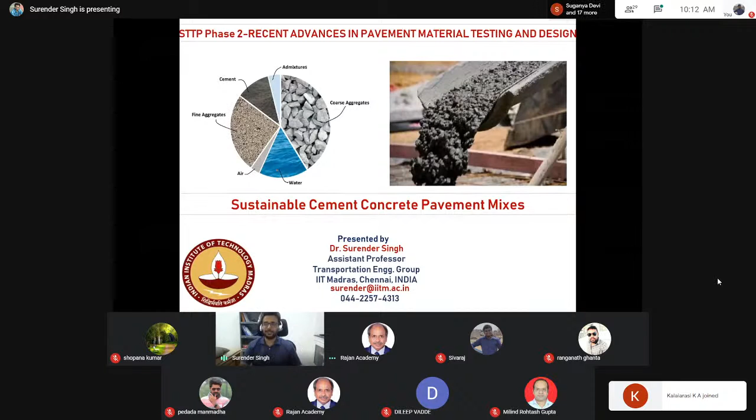Also, we are designing based upon flexural strength, not compressive strength, which is the usual case for buildings. So today we'll start with the introduction, then go through some fundamentals, and then see how to design pavement quality concrete, how to design dry lean concrete, how to design roller compacted concrete, and how to design interlocking tile blocks.

In India we can see everywhere we have pavement quality concrete and dry lean concrete as a base course, and then we have roller compacted concrete. Nowadays it's a recent development and you can see interlocking tile blocks everywhere. So if you are a transportation engineer, you should know how to design these mixes. It's not a difficult job, it's very simple. Today we'll be learning how to design these things and how to induce sustainability with the help of various materials.

If I talk about the pavement section, the cross section of a typical pavement will have the embankment, the subgrade, and two layers of the GSB. Remember, two layers of GSB: one as a separation layer and the other as a drainage layer. The separation layer separates the upper layers from the subgrade, that's why it's a little bit denser. And for providing drainage, we provide again one gap graded GSB layer.

Then we provide a base course, or we can call it an upper sub-base course, named dry lean concrete, which we discussed yesterday. And then we have the pavement quality concrete slab, and in between, to provide debonding, we'll be having a plastic sheet overhead. Now the question is how to design the different layers of a pavement.

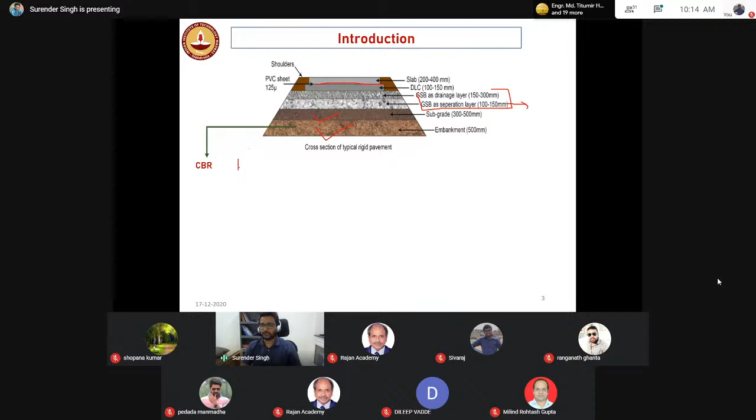For the subgrade and embankment, both we design based upon the CBR value normally. That's the mixture design, not the pavement design. In case of pavement design, we design based upon the modulus of subgrade reaction value, that is the K value.

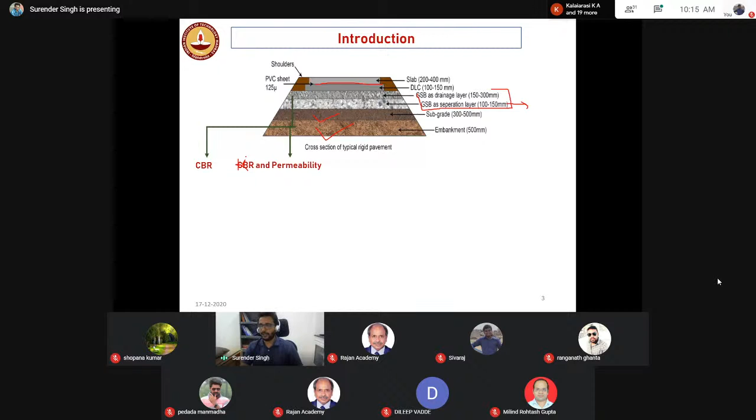For GSB, we design the mixture based upon the CBR value and the permeability. And as far as dry lean concrete, we design the mixture keeping in mind that it should achieve some compressive strength at 7 days of curing.

For the top slab, that is the pavement quality concrete slab, we design based upon the flexure strength. Earlier we were designing based upon the compressive strength, but remember, if you are a transportation engineer, you should design based upon flexure strength. There are other criteria also like abrasion resistance and durability, but we hope that if we are getting the adequate flexure strength, since strength is directly proportional to abrasion resistance and durability, we'll be achieving it.

But if it is a special case, like Tamil Nadu or coastal areas, then we need to design keeping some of the durability parameters in mind. But all over India, in a nutshell, we should design based upon the flexure strength until and unless it has been specified in the tender.

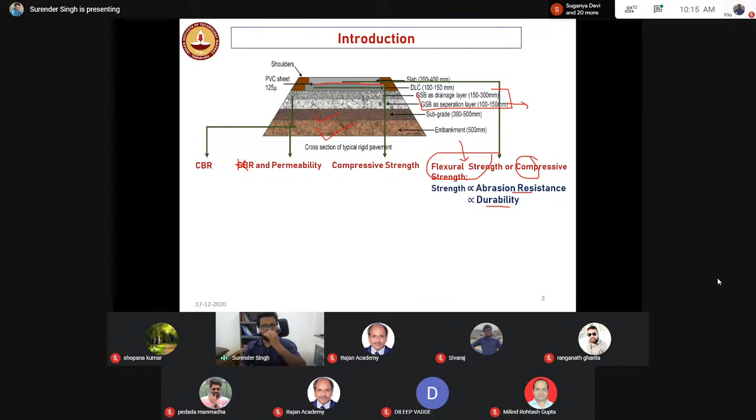So what are the various codes? There are various codes. If you want to design the subgrade or the GSB, you can refer IS 2720. If you want to know the permeability for drainage, you can refer IS 2720 Part 36. If you want to design DLC, you have to refer IRC SP 49, that is Indian Road Congress Special Publication 49. If you want to design the pavement quality concrete, you have to consider IRC 44.

And for roller compacted concrete, we have recently updated this code, and it will be coming in a few months. That is IRC SP 68, second revision. It will be coming soon.

Now coming to the fundamentals, we'll first discuss pavement quality concrete. Let's say I'm sitting in my IIT laboratory, and a contractor comes to me asking to design a pavement for an expressway. We know expressway is very important, so what I'll be doing is asking them for the materials and then doing the mix design.

Let's say the contract requirement for the expressway is that it should achieve 4.5 MPa flexure strength at 28 days curing at field conditions. But remember, I'm sitting in my laboratory, I have my AC, the temperature is 27 degrees Celsius, and I'll be working with a small amount of mixture.

I'll be measuring the water in a pipette, a capillary tube. But what is happening at the field? The scenario is completely different. There will be hotness, there will be wind, they will be measuring the water in buckets and throwing it into the mixture. So you cannot compare laboratory conditions with field conditions.

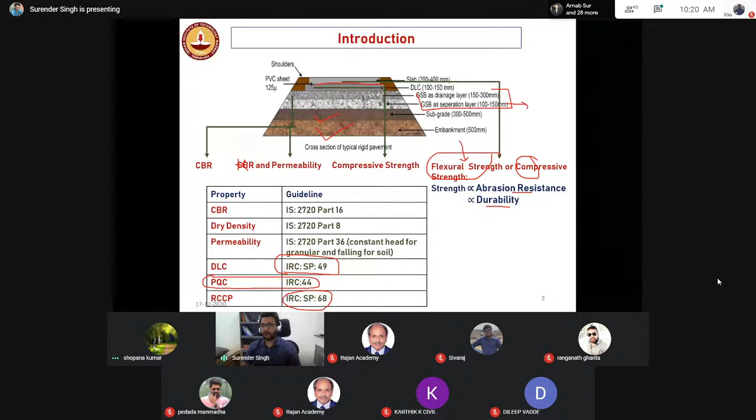Hello? Sir, just a minute sir. Sorry for the disturbance. Can you just show the previous sketch for 2 minutes, sir? Just 2 minutes, 1 minute sir. What happened? I'll be sharing my presentation slides, right? Just this one, sir, other things I have. I didn't get it. Thank you, sir. Thank you, sir, I can proceed. Yeah, I'll be sharing my presentation with all of you, so whenever you want to write something, you can write it down.

So what is happening is that we have two models. When you're designing, you have to decide the target mean strength. So what should be the target mean strength? It's not like you have to achieve 4.5 MPa so you just take 5 and design for 5 MPa. It should not be like that. We don't know at the field what could be the condition, so we'll be taking a higher factor of safety.

So we have two models. Whichever model is giving you more strength, you have to design for that strength, and then you'll be assured that at the field, because of the ambient condition, you can achieve the minimum strength, recommended strength, that is 4.5 MPa for expressways. Why am I teaching this thing? Because it is one of the most important things. Engineers don't know about the design, they think that the design is very, very typical. Definitely the design is a little bit difficult, but today we'll learn how to design in a good, simpler manner.

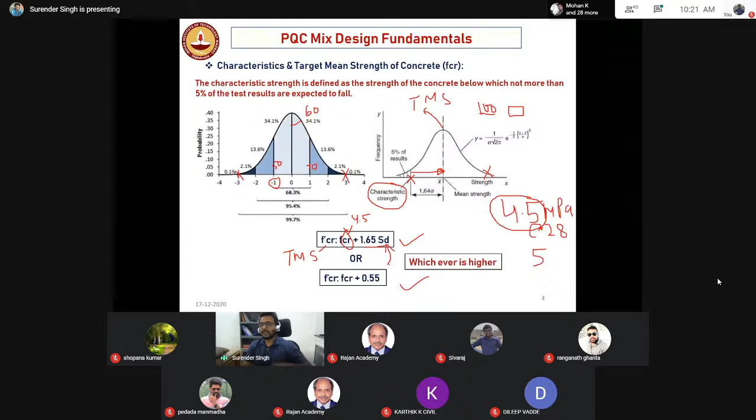So now how to calculate the standard deviation? This question is how to calculate this standard deviation. Nowadays different mixtures are coming, so let's say it's a big project, a big expressway. You have to decide the standard deviation for each mix. So how to do it? You ask the mixture agency. When the mixture RMC will be coming, you make 30 specimens, and then you use this model in order to calculate the standard deviation.

If there are two RMCs coming having different mixtures but the strength is the same - different mixture means, let's say in one of the columns, or in DLC you are using fly ash, in PQC you are not using it, something like that - then you can use this formula. These formulas are simple. N is equal to how many number of specimens you are considering, let's say 30. Xi is your observed flexure strength, and X bar is your average flexure strength, that is average of 30 specimens. And you keep on doing it, you will be getting the standard deviation value.

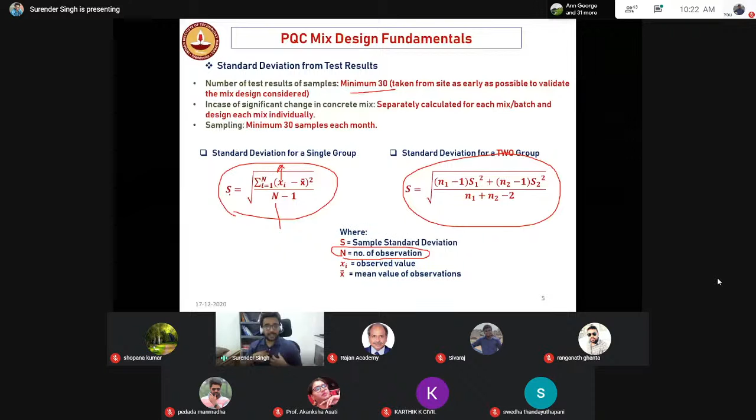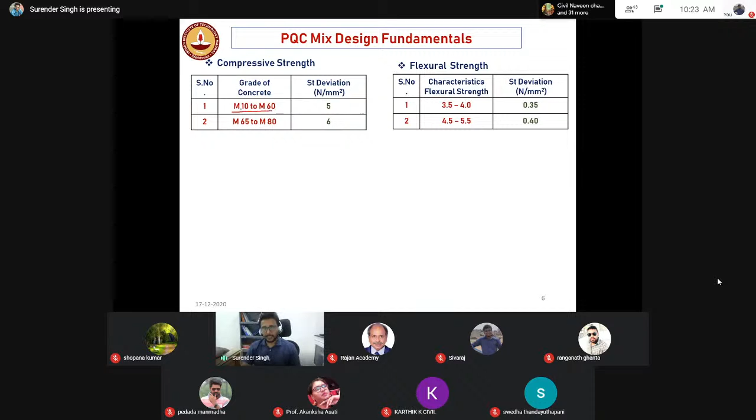If you are not able to remember this formula, or let's say your site is very small, or you don't know how to design the mixture, what you can do is IRC 44 provides you with the liberty to directly take the values from the table. The tables are given in IRC 44. So if you are designing the pavement based upon the compressive strength, when your strength is between M10 to M60 - M10 here means 10 MPa strength at 28 days, M60 means 60 MPa strength at 28 days.

That's why we are writing M60 or M10. Okay, but I suggest you don't go with the compressive strength because it's a pavement. For pavement we need to go with the flexure strength.

If the flexure strength requirement for expressway is around 4.5 MPa to 5.5 MPa, then you can directly take the standard deviation value as 0.4. For national highways and expressways, the strength should always be between 4.5 to 5.5, so you can directly remember the standard deviation value should be 0.40.

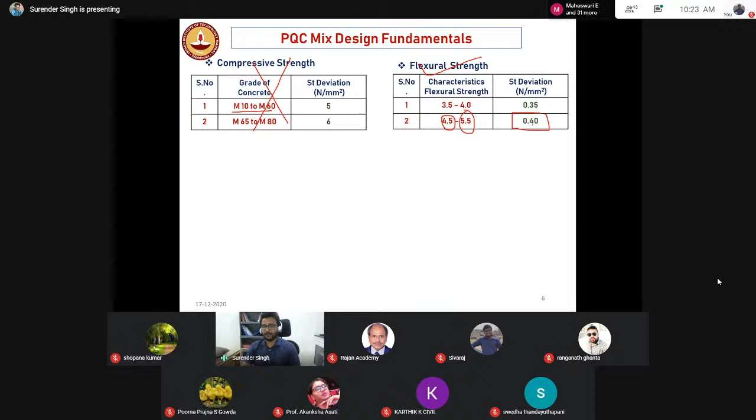So now what was the formula? Target mean strength is equal to the strength you have to achieve, 4.5 MPa plus 1.65 into standard deviation. What is standard deviation? 0.40. Then you will see the value is around 5.16. That means at this laboratory, when you are designing, you have to design for 5.16, and in the field, the minimum strength that should be achieved is 4.5. That means you are taking the factor of safety.

Now the other thing is I have seen many researchers, many faculties in different colleges, what they are doing - they are always casting 100 by 100 cubical specimens to get the strength value, or they are going with 150 mm. But they don't know the fundamentals.

Why are we going with it? It depends upon the size of the aggregate, not the maximum size - yesterday we discussed, right? It should be nominal maximum size, that is the largest sieve over which some of the aggregates will be retained, but not more than 10%. But why is it happening? Because of the wall effect.

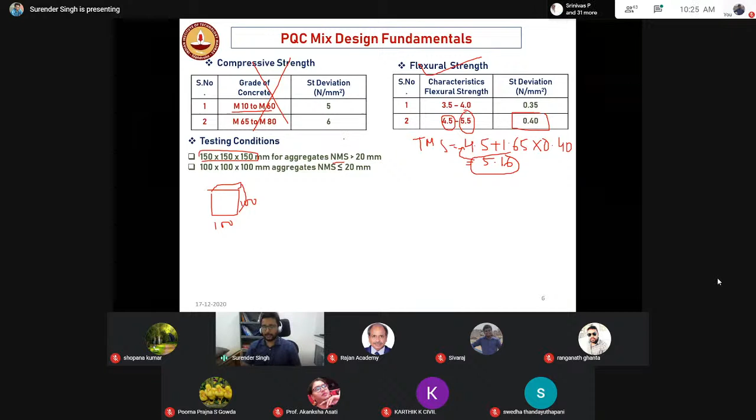Wall effect means, let's say we did one test here. You are making one cube, let's say of 100 mm, and you are taking the aggregate nominal size of 20 mm. So what will happen when you compact this specimen? The aggregates will be compacted easily in the interior, but because there is a steel wall or iron wall - the walls of the mold - the aggregates could not be compacted at the walls, and this is known as the wall effect. When the aggregates are not able to be compacted, the voids will be higher, and if the voids are higher, it will require more cement paste.

So what is happening? We know cement is the most costly component, right? And you are sitting in the lab because you are not having a 150 mm specimen mold, you are taking a 100 mm specimen mold and compacting it - 10% extra cement paste is required, and then you will be getting the strength. But at the field, that 10% extra cement means your economy of the project will be significantly lower. Your cost will be significantly rising.

So that's why if your nominal maximum size is less than 20, then only you can go with 100 into 100 into 100 mm cubical specimen. If your nominal maximum size is more than 20 mm, to avoid the wall effect, we have to cast cubical specimens of 150 into 150 into 150 mm.

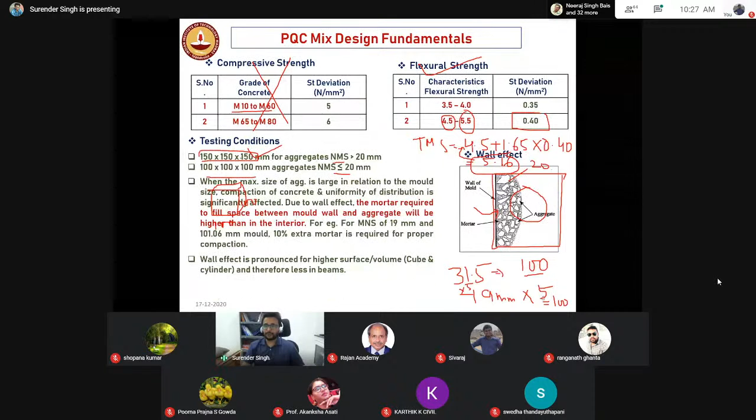But sometimes you will be going with cylindrical specimens. Now the cylindrical specimens can be of two sizes, 100 into 200, or you can have 150 into 300. Which one to select? It depends upon the nominal maximum size. So what you do, you keep the diameter like 150 mm, divide by the nominal size, 31.5 - it should be more than 3. If it is more than 3, then only you can select this diameter.

When you go to the site where the pavement has already been constructed and you are cutting the core, most of the time we are not able to cut the core properly, especially from the dry lean concrete, which is the base course. So how do you cut a core? If your pavement thickness is more, you have to ensure that the height of the specimen divided by the diameter of the specimen should be minimum equal to 1. If it is not, then you cannot test that specimen.

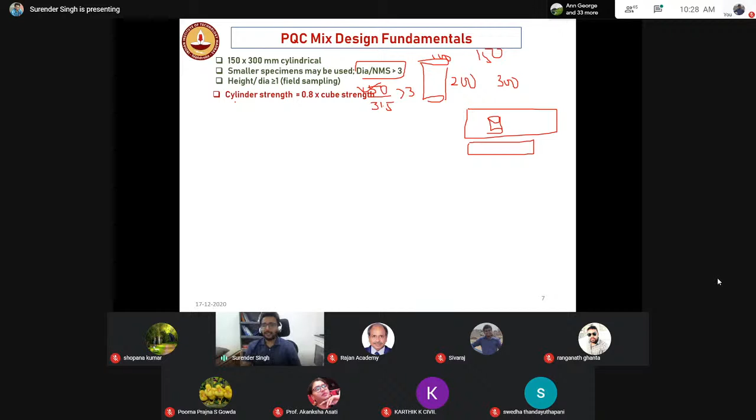These are some fundamentals which will be required when you are in the field. When you are testing your cylinders and somebody is testing cubes, the students working with the cubes will be happy, saying we are getting good strength. But the students working with the cylindrical specimen will not be happy, because obviously the cylindrical strength will be 80% of the cubical strength.

So at the site, when you take out the cylindrical specimens, and what you did during construction was fabricate your cubical specimen, there will be a deviation because of the shape effect.

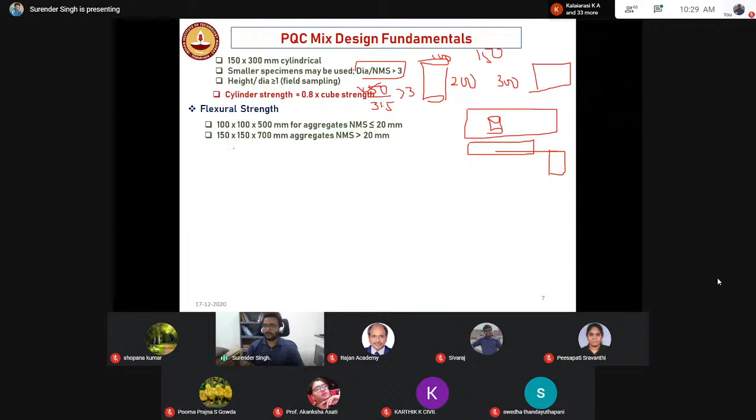If I talk about the flexure strength, normally for PQC, that is pavement quality concrete, we design for flexure strength. Remember, for the field, for the pavement, we always have to decide based upon the flexure strength. So the flexure specimen, we call it the prism specimen.

Similarly to the cubical specimen, when your nominal maximum size is more than 20 for PQC, you have to always go with 150 into 150 into 700 mm. I've seen many research papers where they go with 100 into 100 into 500 mm, despite their nominal maximum size being 31.5, which is wrong.

The other thing I discussed yesterday also: in the structural laboratory you will have a 3-point bending apparatus, and in the transportation laboratory we have the 4-point bending apparatus. So when you are designing your structures, it is 3-point bending. When you are designing your pavement, it should always be a 4-point bending test.

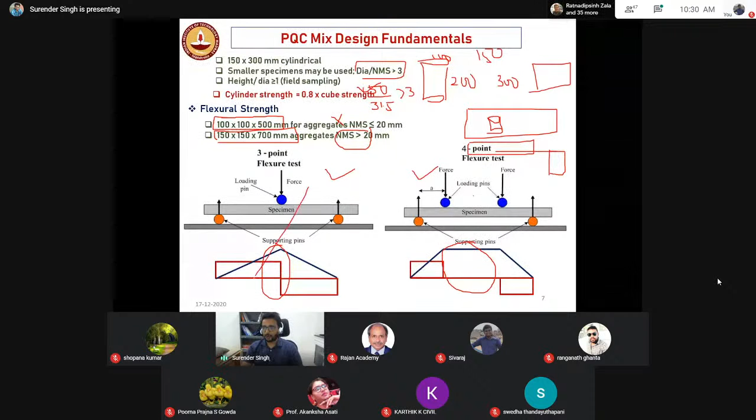Why? Because our pavements always fail in pure bending, where there is no shear force. But if you evaluate the strength by virtue of the 3-point bending, you can see there is some shear force also present at the mid level. That means it is not okay to use 3-point bending when dealing with pavements.

Now, some fundamentals you should always be aware of, like the various factors involved. Let's say a contractor comes to me and asks, sir, I need 4.5 MPa strength but I am not able to achieve it. What should I do? The first question I'll ask is, why don't you increase the cement content, or why don't you decrease the water content? So that means the most dominating factor is the water by binder ratio.

Remember, I'm not using water by cement ratio. Earlier we were using water by cement ratio. Now we use water by binder ratio, because nowadays we are using fly ash, PPC, and slag cement. That's why we say water by binder ratio.

So as the water by binder ratio increases - let's say I'm writing cement for simplicity - when the water by cement ratio is increasing, what will happen? How will it be increasing? Either the water is increasing or the cement is decreasing. When the cement is decreasing, that means obviously your strength will be decreasing. This law is known as Abrams' law: if you want to increase the strength of your concrete, you decrease the water by cement ratio.

The second most important thing is the degree of compaction. Why is degree of compaction one of the important parameters? Because let's say a field engineer used 300 kg of cement, next time he used 400 kg, next time 500 kg, and still he is not able to get the required strength. Why?

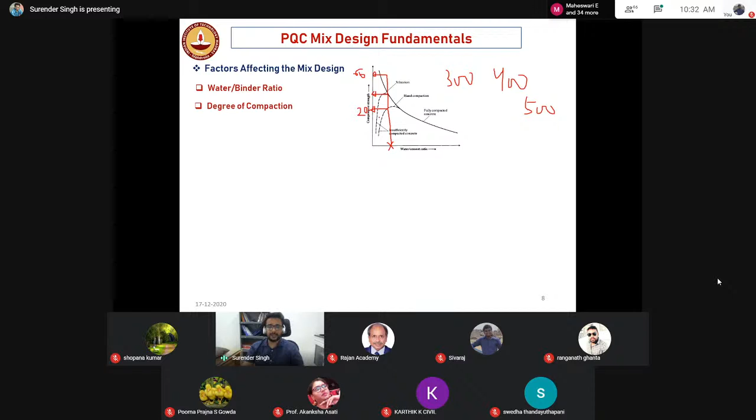At a constant water by cement ratio, if you are not able to compact your pavement fully, you can get three different strengths. The strength can vary from 60 MPa to 20 MPa, because of poor compaction. That's why compaction is very much required - you have to do proper compaction.

The third thing is shape of the aggregate. If you are having angular aggregates, aggregate to aggregate interlocking will be there. The voids will be lesser, so the cement paste requirement will be lesser, and the strength of the concrete will be more, because strength of the aggregate is more. Similarly, if you are using well-graded aggregates, the porosity will be lesser, strength will be higher.

And the size - yesterday we also discussed that the nominal maximum size of your aggregate should always be the thickness of your pavement slab divided by 3 to 5. We need good aggregate interlocking, so the nominal maximum size should always be lesser than the thickness of your pavement slab divided by 3 to 5.

Why? Because if you increase the size, the cement paste requirement will be lesser, but the bonding between the cement paste and your aggregate will be very poor. Bleeding water will be there, and if the bleeding water is coming, the water by cement ratio will be increasing, and you will be getting lower strength.

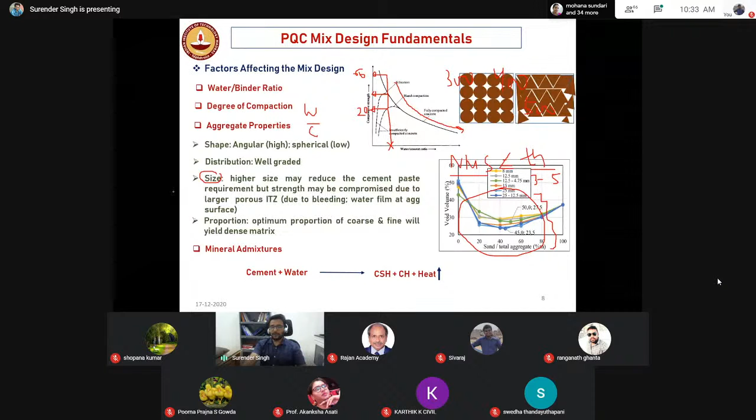Similarly, the ratio of coarse aggregate to fine aggregate is an important parameter. Nowadays you will have this question - why are we using fly ash? Sometimes I'm afraid if I use fly ash it's not giving these properties, or it's a waste material, why use it? So the fundamental is that when you add cement with water, you get two hydrated products named calcium silicate hydrate and calcium hydroxide.

This calcium silicate hydrate (CSH) gives you strength, and this calcium hydroxide (CH) doesn't give you anything - it's also a durability concern. So for strength I need CSH, and this CH is a byproduct. Can't I convert it into CSH? Yes, obviously you can convert it - you have to add silica externally from outside.

So whatever waste materials you want to use for replacement of cement, you can use it, but it should have silica in it. Fly ash has around 70% silica, silica fume has around 90% silica. That's why when they are used, they increase the strength as well as reduce the durability risk.

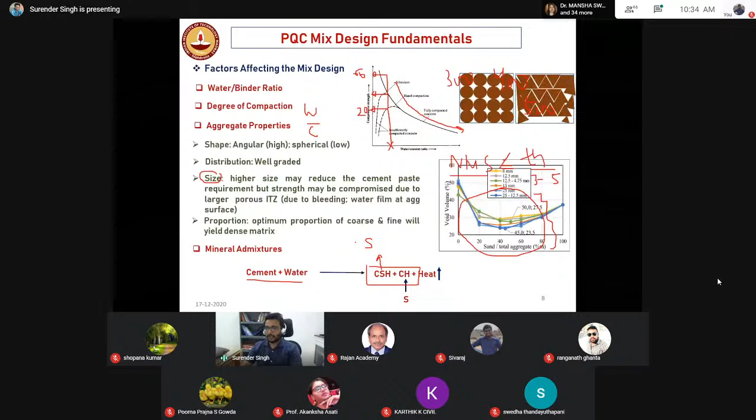Now the other question is that we have two approaches: weighing approach and volume approach. You have seen at the site what is happening - for normal house construction, they will be using some pans, in Hindi we call it a tasla.

So they will be filling it and then dropping it in the mixture. But you have seen that when they are taking the aggregate, they'll fill the pan fully, but when they are taking the cement, they'll keep it lesser. That means volume batching is not good at field conditions.

But when you are a researcher or designer, the weight method is not good. So which method is good? At the field, volume batching is not good because they use the same bucket for cement and aggregates, filling cement lesser and aggregate more. So the mix design will be changing.

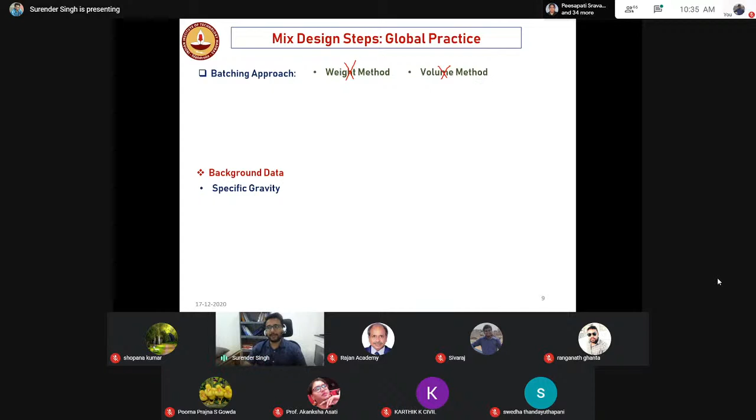But for the designer, the weighing method is not good because let's say we have two aggregates of the same size, but one aggregate has porosity - say some recycled aggregate. Yesterday we discussed that recycled aggregate has lesser specific gravity. If you follow the weighing approach, what happens? Let's say, hypothetically, one heavy aggregate equals two porous aggregates by weight.

And when you are keeping it in the concrete formwork, it will occupy the same space because the shape and volume are the same. The shape of the aggregate is same, the size of the aggregate is same, so it will occupy the same volume and the concrete will be poor.

So that's why we say that the weighing approach is not good. We have to consider the specific gravity of the aggregates. If you are considering the specific gravity, then we can design a very good mix. But for that, when you are designing, you have to consider the volume approach. But when you are recommending your mix design to the field engineer, then you have to recommend it in terms of weighing approach, because at the site complications can be heavy.

I have a few pictures also that I'll be sharing at the end of the presentation. So what are the data that will be required?

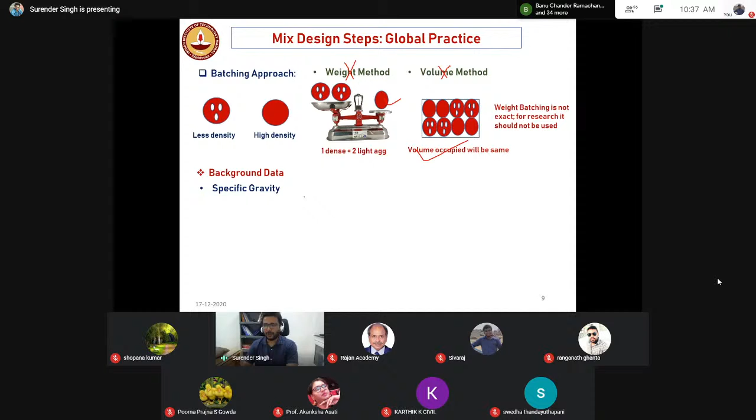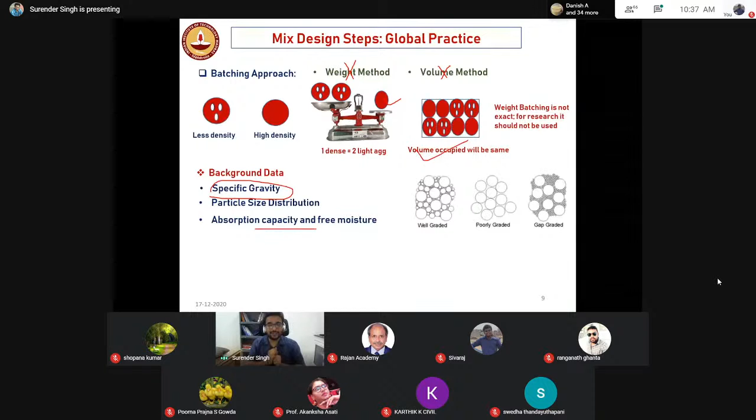Definitely, I need the specific gravity values. I'll be needing the particle size distribution. I'll be needing the water absorption capacity of the aggregates. Why? Let's say yesterday night in Chennai it was rainfall, and you thought you will be making your pavement, but because of the rainfall, the aggregate has absorbed some water, so it will be changing your water by cement ratio. So you should know about this, how much water absorption can be there, and there are many more things.

So at world level, what is happening? Everywhere the design of the pavement is almost the same. So if you get to know this step, then definitely you can design the pavement everywhere across the globe. So these are the steps. We'll not go into the detailed steps.

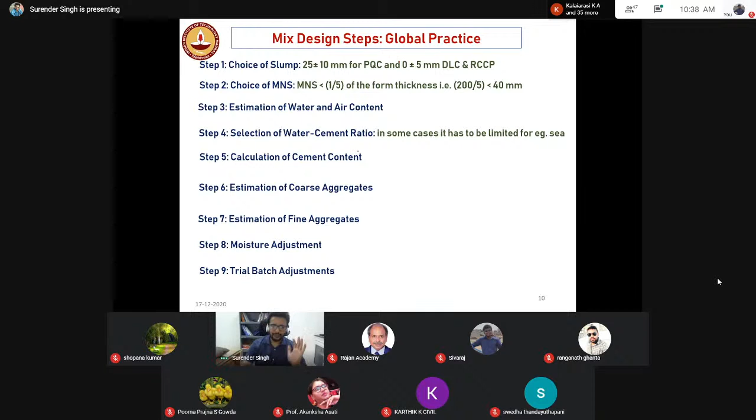We'll be seeing a simple procedure. So what we need for our concrete - we are mixing coarse aggregate, we are mixing fine aggregate, we are mixing cement, we are mixing water, and nowadays we are mixing fly ash also. And when you are compacting it, there will be some voids, that is air voids. So as a designer, you have to design this thing, based upon the volume, and then you are recommending to the field engineer in terms of the weight - what should be the weight of water, fly ash, fine aggregate, and coarse aggregate. If you are using some recycled aggregate, you can add that also here.

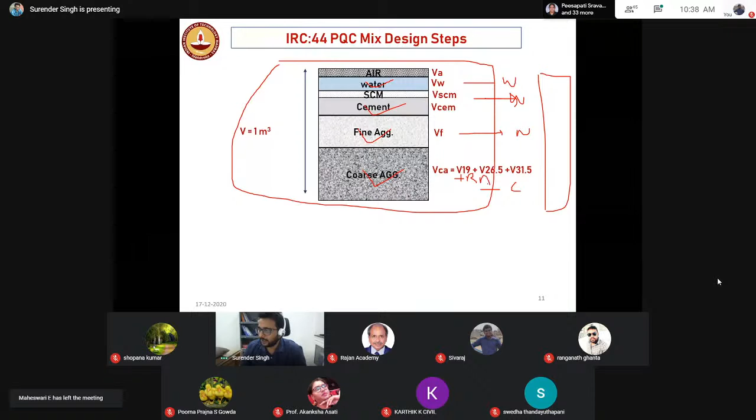So how to design it? Remember two things here: you have to design based upon the volume, and then you have to convert the volume into weight. Why weight? Because at the site, volume batching is not considered to be good. So how to convert volume into weight?

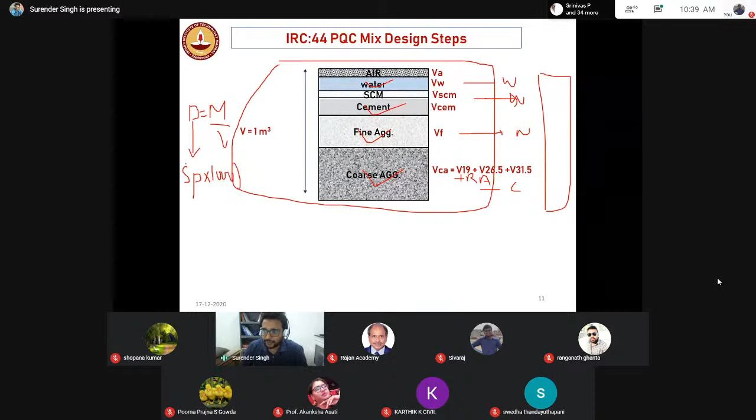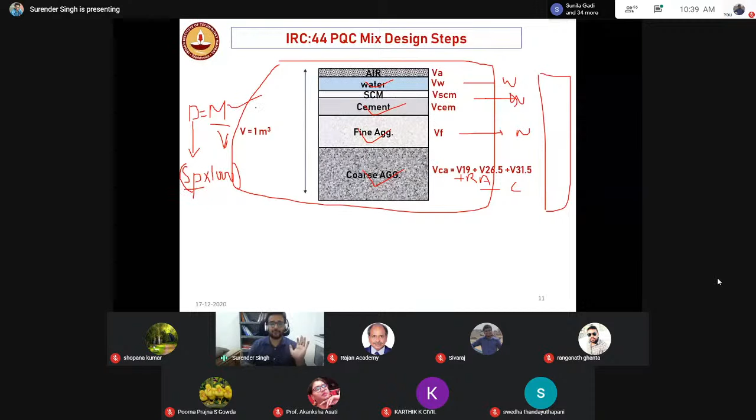You know the formula - density is equal to mass upon volume, right? And what is density? Density is nothing but specific gravity into 1000, because we are measuring with respect to specific gravity of water. So if I know the volume, and if I know the specific gravity of coarse aggregate, fine aggregate, cement, then I can get the mass. This is the simplest formula that you have to remember, and you can design your pavement.

So we discussed this. So what is the step? First of all, remember this picture or the schematic. We have to decide the volume of air, volume of water, volume of fly ash, volume of cement, volume of fine aggregate, volume of coarse aggregate. We have to design, and then with the help of density equals mass upon volume, we have to convert it into weight. So in a nutshell, we have to recommend in terms of the mass of coarse aggregate, fine aggregate, cement, or whatever other material we are using. So how to do it?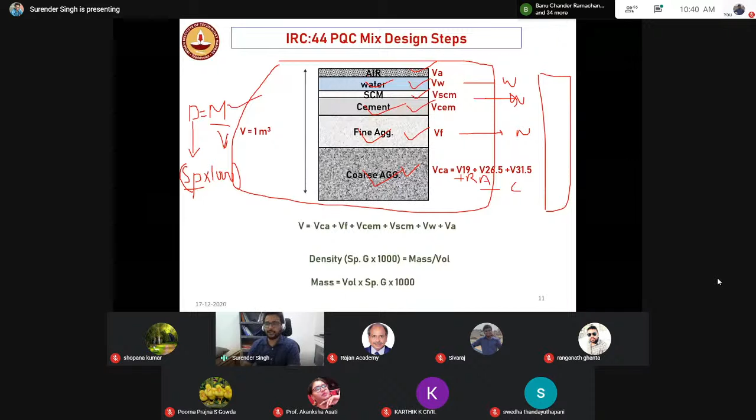One by one we'll be finding it out. First thing is air - how is the air coming? When you are compacting your aggregates, when you are compacting your mixture, there will be some voids. So how to decide? You don't have to decide - there is a table given in IRC 44 specifications. Based upon your nominal maximum size, you can directly read the air void. And remember, for PQC, the nominal maximum size is 31.5, so you can directly remember this value 0.8. It's very simple, right? What is the next step?

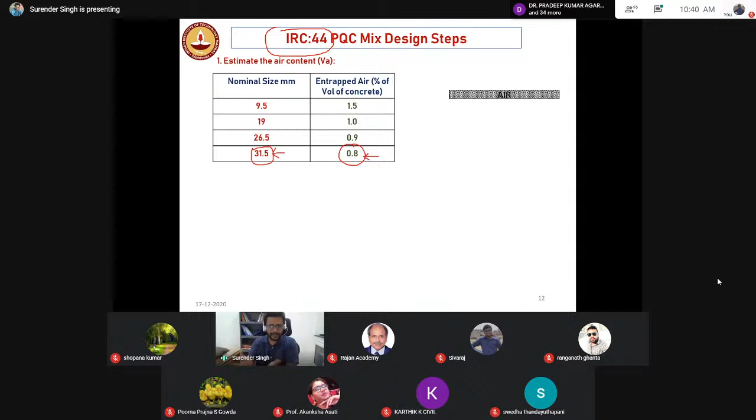You have to calculate the water, you have to calculate the fly ash, you have to calculate the cement. So how? Let's say we know the water by cement ratio, that is the important parameter we discussed in the factors affecting.

It is a more dominating parameter, right? So there is a table given in IRC 44, and we know for my expressway - this time we are designing the expressway, right? Let's say the strength requirement is 5 MPa.

And you are using cement OPC 43 grade. So from the table you can get the value of 0.34. This should be the minimum water by cement ratio that you have to use. So you got the minimum water by cement ratio that you have to consider is 0.34.

So now if I can able to get either water or cement, because I have already the water by cement ratio, then I can decide the cement also, right? So the first thing is water. How to decide the water? Again there will be a table, because the IRC 44 is providing you everything. You just need to know the fundamentals and the design procedure.

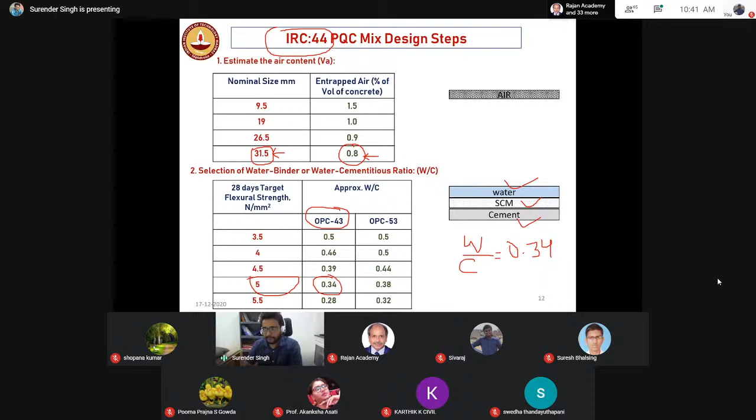We know water is being affected by many things that we have discussed. Like if you are increasing the cement content, what will happen? You will be needing more water. If you are increasing the size of the aggregate, you will be needing lesser water because of the lesser surface area. If you are using round aggregates, because they are having lesser surface area, they will be requiring lesser water. If you are using super plasticizer, you will be requiring lesser water. So there are many factors on which the amount of water will be affecting.

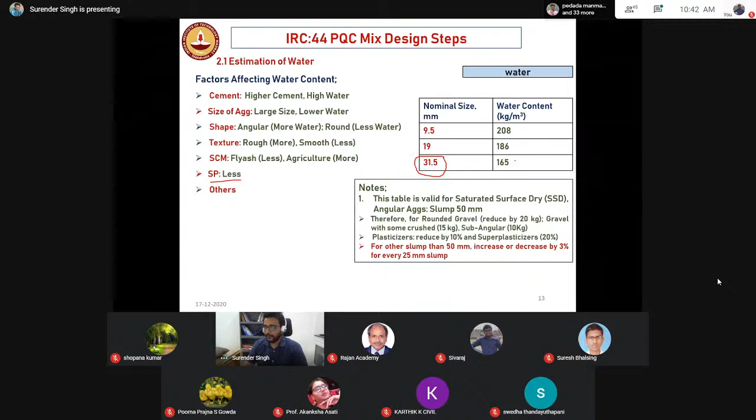So these are the fundamentals. If you want to learn, you can learn, or else there is a table given in IRC 44 which says that if you are designing your PQC mixture whose nominal maximum size is 31.5, you can directly get the water from the table, which is 165. But remember one thing, this table is valid for a slump value of 50 mm, and for PQC our slump value requirement is 25 mm.

So obviously if this water is corresponding to 50 mm slump, if you want to reduce this slump, what do we have to do? We have to reduce the water, right? So how much water do we have to reduce? We have to reduce it by 3%. Our water by cement ratio was 0.34, our water was 165, but we have to reduce it by 3%. So what should be the water? 0.97 multiplied, you will be getting the water around 158 kg.

Now if I get the water, I keep the water here, I bring this one here, I can get the cement value. And then you have to check that the minimum cement value should be 360 kg and the maximum cement value should be 450.

Now this is a twist here. As a student, as a field engineer, I think that if I keep on increasing the cement content, my strength will be increasing. But IRC is asking you, no, you cannot increase the cement content beyond a particular limit. What is the reason? I'll not be telling you the answer - maybe some of you know the answer or you can guess it. See, in my class you can guess anything. Until and unless you are not guessing it, that means you are afraid, or you don't know, or you are not getting what I'm teaching here.

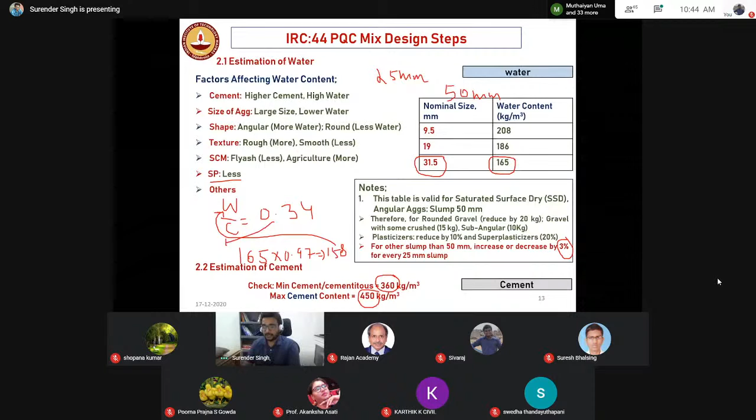Now the next thing is that this is the sustainability aspect. Nowadays we are using fly ash. The ministry says that you can use fly ash up to 30%. Let's say you are using 20%, and your cement content came out to be 400 kg. The ministry says that you can replace cement by fly ash in a proportion of 20%. So what should be this fly ash content? Obviously you will be multiplying by 20, and you will say yes, we can use fly ash as 80 kg, and then 320 we can have as the cement content, right? This is the normal procedure.

What you are thinking is that the ministry is saying you can replace cement by 30%, or let's say 20% fly ash for this example. So what should be the fly ash? Okay, 400 kg is cement, they are saying 20%, so you multiply by 20, you get 80 kg. If you are using 80 kg of fly ash, then 400 minus 80 is 320 kg of cement you are using. But this is the wrong procedure.

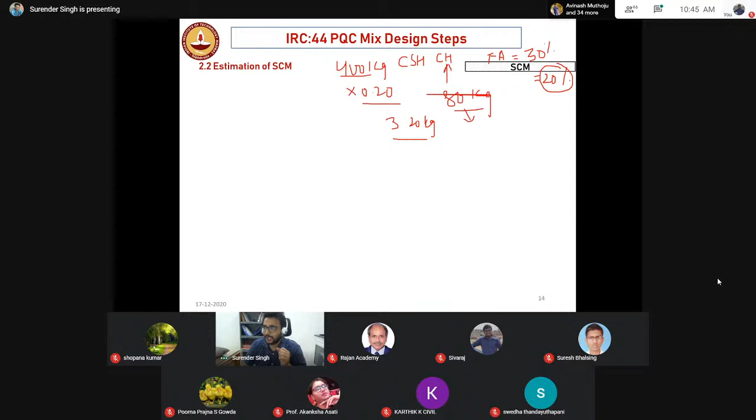Remember, this is a recent advancement of fly ash you should know. Remember we discussed that when you add water with cement, you get CH and you get CSH. So what you are doing is adding fly ash from outside, it will react with CH and convert into CSH. That means it's a cementitious material, right?

So every waste material will be having different cementitious content. So if we come to the laboratory, we have to think how much cementitious content it will be giving me if I'm using some supplementary cementitious mineral admixture, that is SCM. If you don't have any value, if you don't have the laboratory, simply you can increase the cementitious content by 10%. We'll take an example.

Let's say we have 400 kg that we were using. Now if I'm using fly ash, let's say 20%. So I can see, without any experimental data, I'm thinking that with the help of fly ash I can increase the cementitious content by 10%. So you have to multiply by 1.10. You'll be getting a value of around 440. So that means now the cementitious content has been increased.

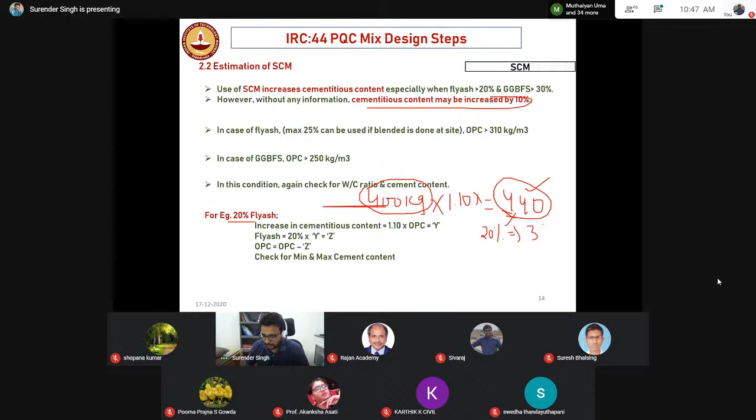Earlier, how much cement were you using? 400 kg. But because you are using 20% fly ash, your cementitious content will be increasing by 10%. Now your new cementitious content will be 440. Replace this 440 - 20% of this 440 should be your fly ash. How much is it? 0.80 into 440. It will be... no, 352 kg of your cement, and then 88 kg is your fly ash.

See the difference. Earlier, you were having fly ash as only 80, right? But cement was lesser. Now your cement is further more and the fly ash is increased. That means this is the method. I can repeat again if you want. Simplest thing is you have to come to the laboratory and see how much cementitious content can be increased. If you don't have any information, simply increase by 10%, and then you replace that cementitious content with 20% fly ash, and the rest will be cement, OPC.

So now we got the values of air, fly ash, water, and cement. Now what things are left? It's coarse aggregate and fine aggregate. Here there is a trick - we will be calculating the volume of coarse aggregate with respect to fine aggregate.

There is a table given in IRC 44. You don't have to be confused. What is the nominal maximum size? 31.5, right? What is the zone of the fine aggregate? We discussed yesterday that there are 4 zones - zone 1, 2, 3, and 4. Nowadays we are having only 3 zones - zone 1, zone 2, zone 3. We have abolished zone 4. So your fine aggregate is zone 2, your aggregate size is 31.5.

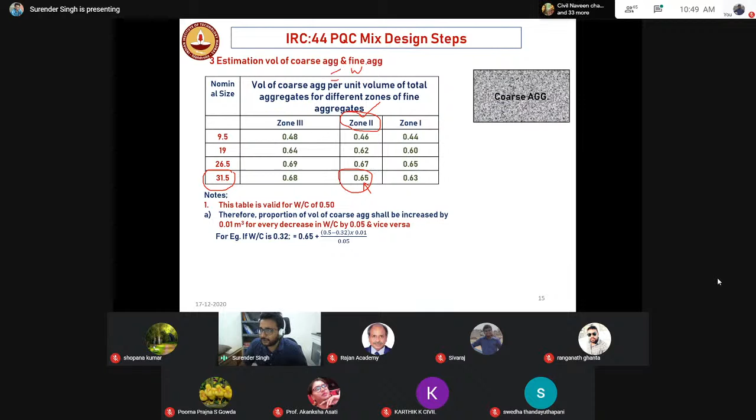Then you have to simply take the value from here. That means this shows that the ratio between coarse aggregate to fine aggregate is 65-35. Simply, it's a simple thing, you don't have to worry about anything. But remember again, this table is valid for a water by cement ratio of 0.5. And in our example, what was our water by cement ratio? It was 0.34. So that means you have to increase it.

In order to get more strength, you have to increase this ratio of coarse aggregate to fine aggregate. How to increase? It's given here. They are saying that if you are reducing your water by cement ratio by 0.05, you have to increase this content by 0.01 meter cube. In our case, what is the value? 0.34. So by how much are we reducing our water by cement ratio? By 0.16. So in that case, how much do we have to increase this? It is 0.01 divided by, this will be coming here, 0.05 into 0.5 minus 0.34. By this much we have to increase our content.

So now you got the value. One second, don't get confused. You simply have to read the value from the table, coarse aggregate to fine aggregate. Coarse aggregate 65%, what should be fine aggregate? 35%. Okay, that's it, now you got everything.

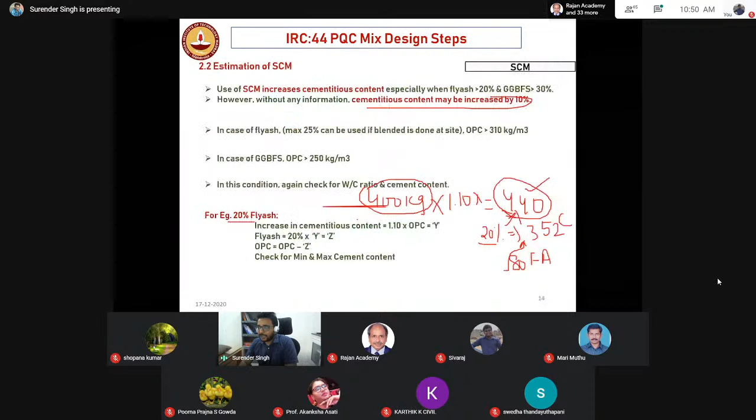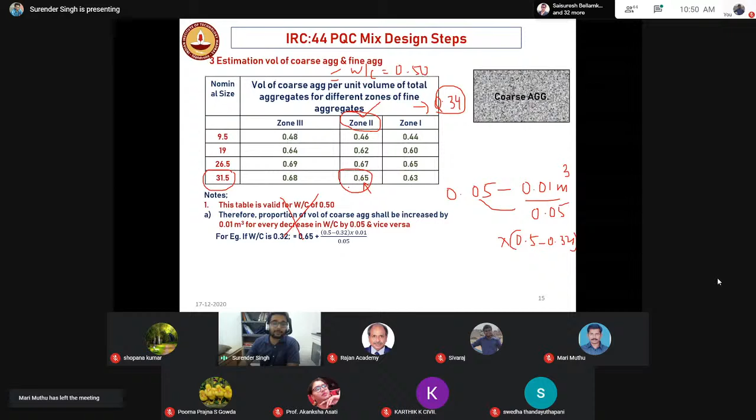But now, if you remember correctly, in the previous slides we were getting water in kg, cement in kg, and now you are getting your volume of coarse aggregate and fine aggregate in proportion, 65-35. You have to convert it. How to convert it? We have a simple formula that we have discussed.

What we have to do is decide this mixture. You have to give a mix design to the contractor in mass. Now you have to calculate the mass of fine aggregate and coarse aggregate, but we don't have it. What we have here is coarse aggregate 65%, fine aggregate 35%, right?

So what to do? Simply, I'll assume that the total volume is V, or 1 meter cube. I know the mass of water, I know the mass of fly ash, I know the mass of cement. Can I convert this into volume? Yes, obviously, we know density is equal to mass by volume.

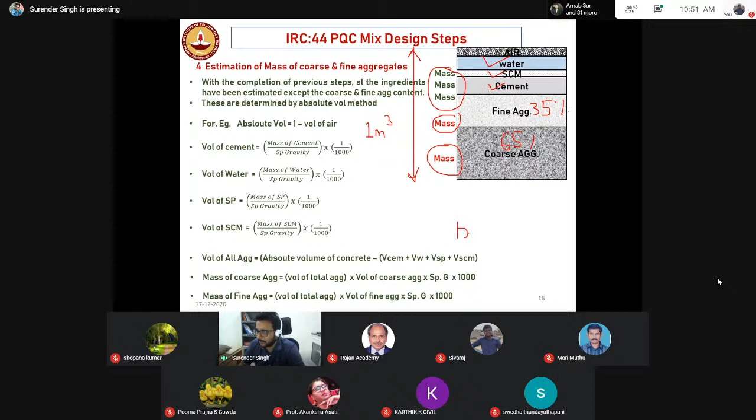I know the mass, I know the density. What do you mean by density? It is specific gravity into 1000, right? So how to convert the mass of water into volume? What is the specific gravity of water? It is 1. 1 into 1000, and then volume is equal to mass by density.

Then how to calculate the volume of cement? Volume of the cement - I have the mass of the cement at 400 kg, right? What is the specific gravity of cement? 3.15, and you can get the volume.

So what I mean to say is, if I take the total volume as 1 meter cube, and I know the volume of air, volume of water, volume of SCM, volume of cement, then if I subtract this volume from the total volume, I'll get the volume of coarse aggregate and fine aggregate, right? And we already have the proportion 65 and 35, so we can simply convert it into mass with the help of this same formula.

Okay, because of the paucity of time, we will not be able to cover everything, because in my normal classes I'm covering mix design in around 5 to 6 classes. So I'll be sharing my presentations with you, you can go through it. Let's take a quick example.

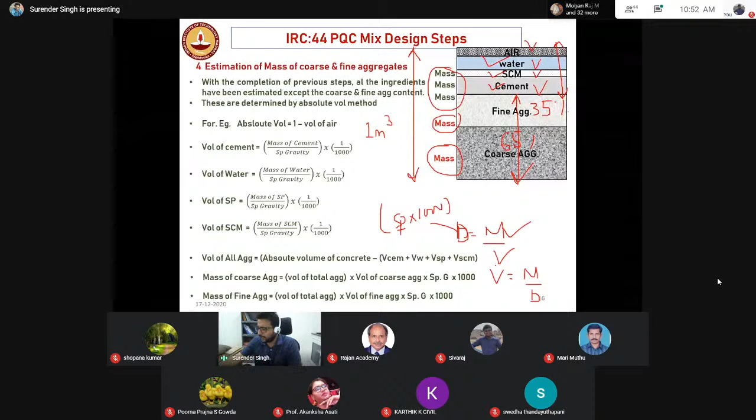This is the design that we did for an expressway. The contractor came to us and asked that they need a flexure strength of 4.5. The nominal maximum size of the aggregate is 31.5, and they are going to use OPC 43, and they are also going to use superplasticizers.

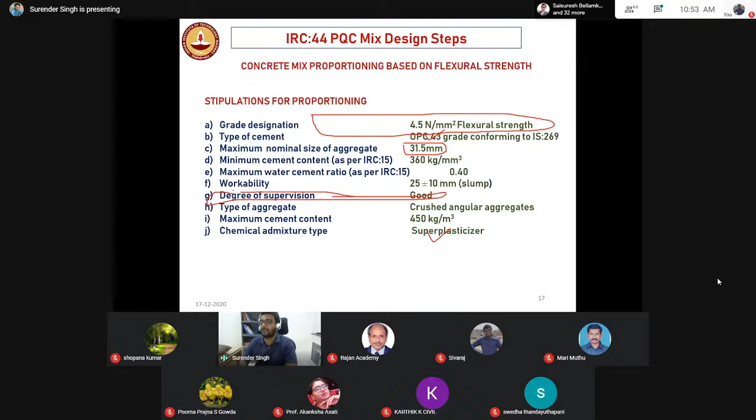I asked them, how is the degree of supervision? He said, yeah, it's fantastic, it's good. That means they don't want to take a higher factor of safety, because the supervisor is experienced. But then also we have to take a higher factor of safety, right? We don't know the environmental conditions.

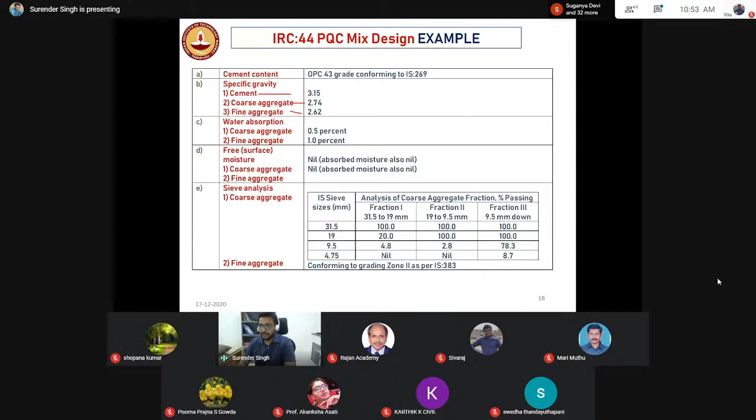So what I did, I asked them for the aggregates. They gave me the aggregates, they gave me the cement. I calculated the specific gravity of cement, coarse aggregate, fine aggregate, water absorption - everything I calculated.

Then, first thing is it's an expressway, I don't want to take any risk. We need to take a factor of safety, right? So we have to design for target mean strength.

How much did he ask from me? 4.5 MPa, right? And what should be the standard deviation value? I directly read it from the table, that is 0.4. If you put this 0.4 here, you will get 5.16. So that means I have to design the mixture at 5.16. Then only at the field, 4.5 will be achievable, right?

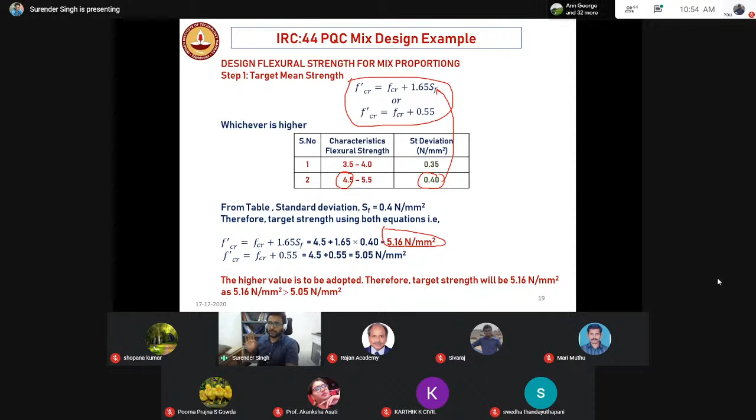First step over. What was the second step? I have to give the mass of water, SCM, fly ash, fine aggregate, and coarse aggregate, right? So I'll go step by step. First thing, A - we can directly read it from the table, because in that expressway they were using aggregate size of 31.5, and what should be the air?

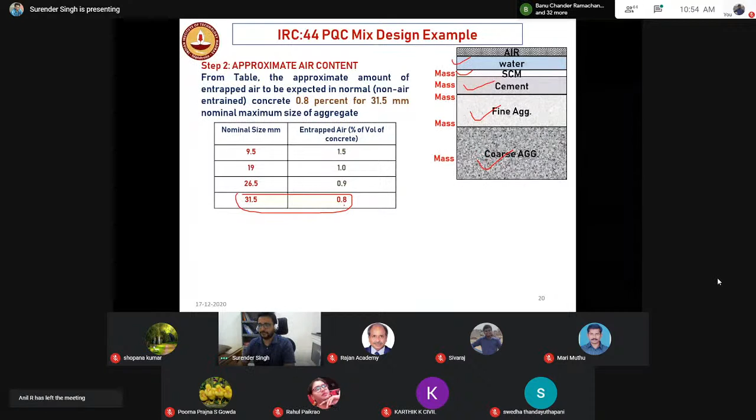It is 0.8%. Third step was water by cement ratio. The strength required is 5.16. We are designing for 5.16, and the table says if it is 5, keep the water by cement ratio as 0.34. If it is 5.5, keep it 0.28. But my value is intermediate, so I have to do interpolation. I did the interpolation and found the water by cement ratio I had to select is 0.32.

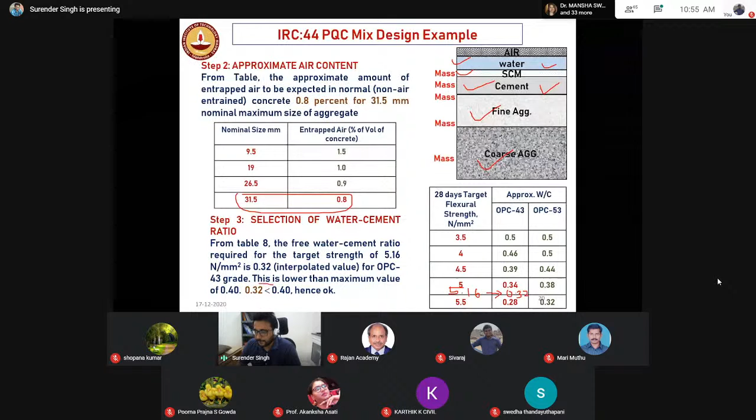Okay, so water by cement ratio, we got it. Now water - we already discussed you can directly read it from the table at 165 kg. But here there are two things. One, this table is valid for a slump value of 50 mm, but our slump value is 25 mm, so we have to reduce it by 3%. I reduced it, so it came to be 160 kg.

But again, the contractor told me, sir, we are using super plasticizers, and super plasticizers will reduce the water demand. We did the trials and found that with the super plasticizer they were using, it could reduce the water content by 20%. That means you have to further reduce this water by 20%. So 160 into 0.8 is 128 kg. This is the water content that I will be getting.

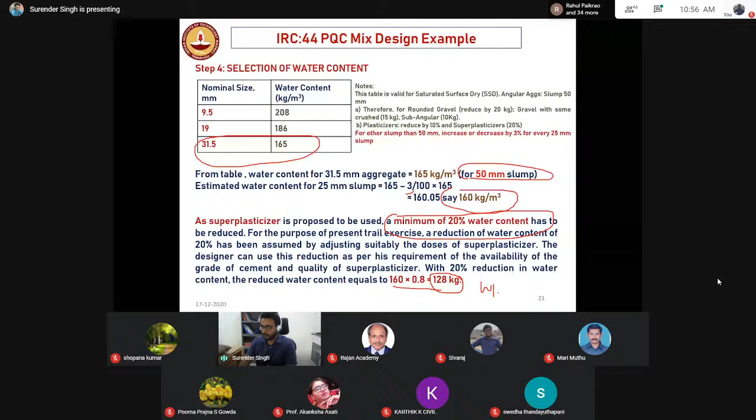So my water by cement ratio is 0.32. I got the water value and simply I can get the cement value. Cement value is 400 kg. So I got water, I got air, I got the cement. Then I have to check that the cement content should be between 360 to 450. Yeah, it is in between. I again remind you, you have to type in the chat box why there is a limit of 450 kg.

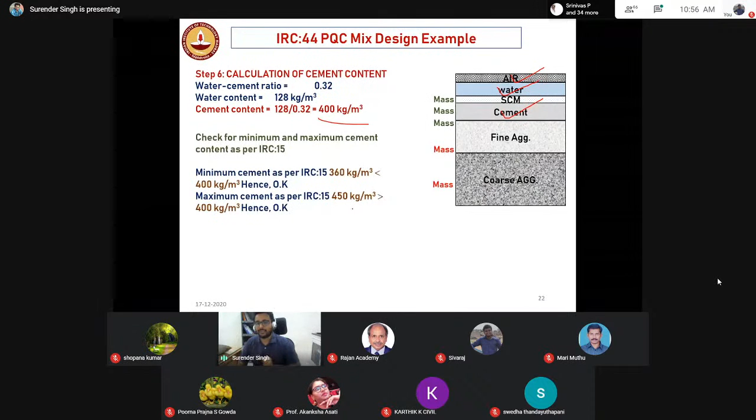Next step is fine aggregate and coarse aggregate. Simply, the tables are already available. What is this zone of fine aggregate? Zone 2. What is the size of the aggregate? 31.5. What should be the proportion? 65%. What should be the proportion for fine aggregate?

35%. And we have to just tweak it because this table is valid for the water by cement ratio of 0.5. In our case, the water by cement ratio is 0.32, so that means you have to increase this ratio by some quantity. We already discussed that if there is a reduction of 0.05 in this water by cement ratio, you have to increase it by 0.01. Okay, we wrote it, and then simply, if there is a reduction of this much, how much needs to be increased? We got this value as 68%.

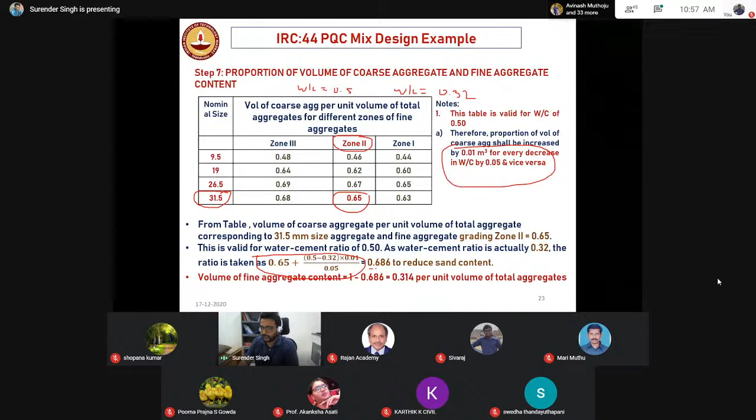Now, coarse aggregate is 68 and fine aggregate is 32. Now, again, I got the mass of water, I got the mass of cement, I know the volume of air, but I don't know the fine aggregate and coarse aggregate, right? So what we did - we assumed that the total volume is 1 cubic metre. If I reduce the volume of these things, let's say volume of this thing V1, we can call it V1. If I know the total volume and the volume of these things, I can definitely get the volume of coarse aggregate and fine aggregate.

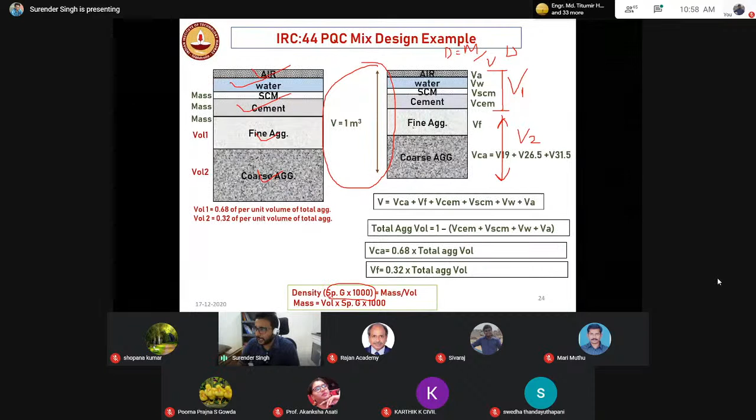How? First of all, we know the mass of water, we know the mass of cement, and we know density equals mass upon volume, and density is nothing but your specific gravity into 1000. We already know the specific gravity, so then we can get the volume of water and volume of cement. If I get the volume of water and volume of cement, I have to subtract it from the total volume, and I'll be getting the volume of coarse aggregate and fine aggregate.

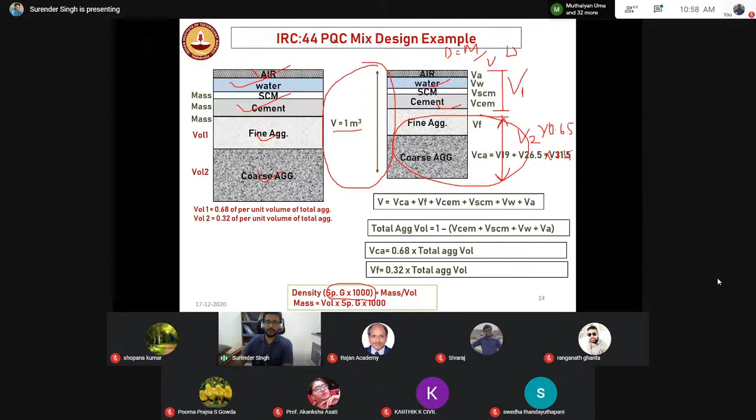And obviously, from this table I already know that the coarse aggregate and fine aggregate proportion is 65 and 35, so I can directly multiply it by 65% and 35%, and I'll be getting the volume of coarse aggregate and fine aggregate. See, look, it was so simple - it was very, very simple. So I have written all these steps here. What you have to do is just go and try to solve this example. You'll be getting everything.

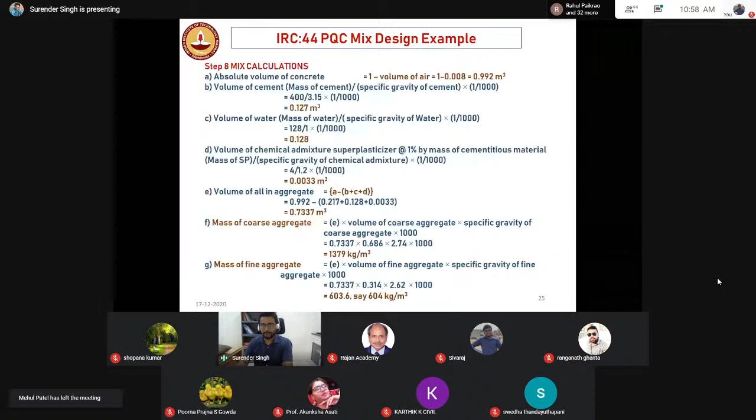There is nothing so difficult in here, but there are a few things. First thing is that you're designing based upon SSD condition. SSD condition means your aggregates are already soaked in water. But is that the condition that can be achieved at the site? Yes or no? No. Why?

But for designing, we have to consider volume batching because of the changes in specific gravity. Second thing, can you achieve SSD condition at the site? No, because SSD condition means you have to completely soak the aggregates with water. For coarse aggregate you can do it, but for fine aggregate it's nearly impossible. That's why at the site we are using aggregates in dry condition.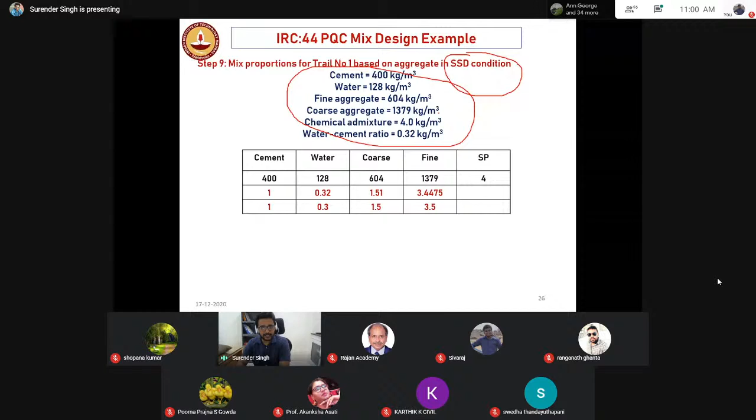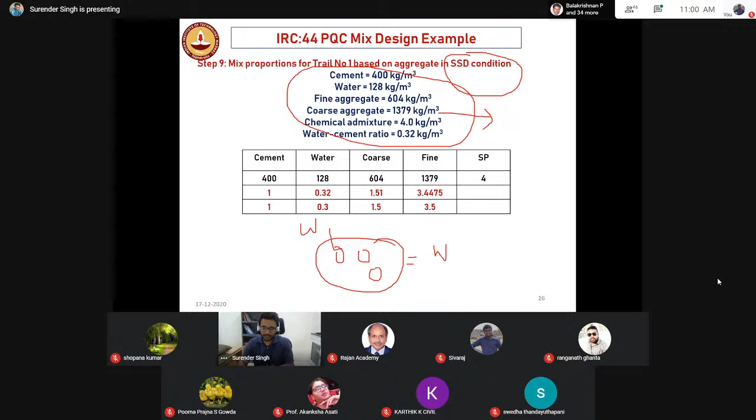Now, the mix design that you did is in SSD condition. How to convert this SSD condition into dry condition? SSD condition means this was your aggregate, these were voids, filled with water. I have to remove this water. So when you remove this water, what will happen? The weight of the aggregate will be reducing. So simply what you have to do is reduce the weight, reduce by the water absorption, and add that water to the total water.

Why? Because earlier your aggregate was filled with water. Now you are removing this water, so the mass of the aggregate will be reducing. But when you keep it in the mixture, the dry aggregate will again be absorbing water from the mix. So the weight that you reduced, you have to add it to water, and then your mix design will be ready. This is the mix design in dry condition.

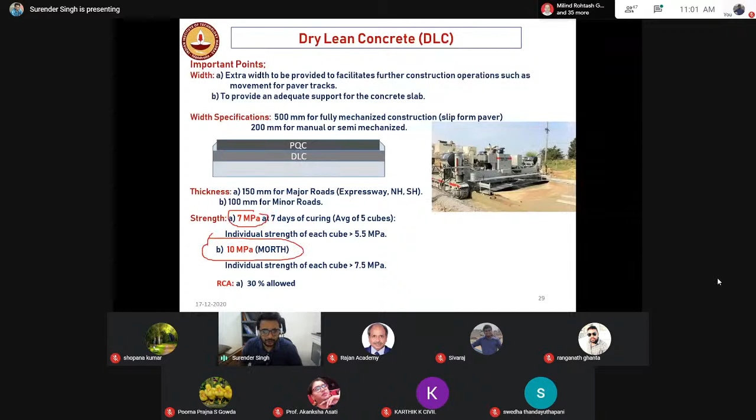The last step is dry lean concrete, the DLC or dry lean concrete, which is the base course. We discussed this yesterday also. It's a straightforward design, you don't have to do anything extra. The strength requirement is 10 MPa, don't go with 7 MPa - it's an obsolete code. Nowadays we design the DLC based upon 10 MPa strength. It's a very, very simple design.

What you have to do is design the coarse aggregate, fine aggregate, cement, fly ash, water and air. The PQC design was a little bit longer, this is very short. What you have to do is assume an aggregate to cement ratio. Let's say I'm assuming 10:1 - 1 is your cement, 10 is your aggregate.

Then assume the cement content. The code says it should be minimum 150 kg, so I'm taking 150 kg. So what is my cement value? 150 kg. What will be my aggregate? The ratio I am taking is 10:1, so multiply by 10, that means your aggregate should be 1500 kg.

Now water - how to calculate the water? You know the Proctor test, OMC, MDD. You have to calculate the OMC and MDD, and you will be getting the water. The simplest thing - then you calculate the compressive strength. If the compressive strength is less than 10 MPa, you have to increase the cement content. Earlier we were taking 150 kg, then you have to take 160 kg. See how simple it is.

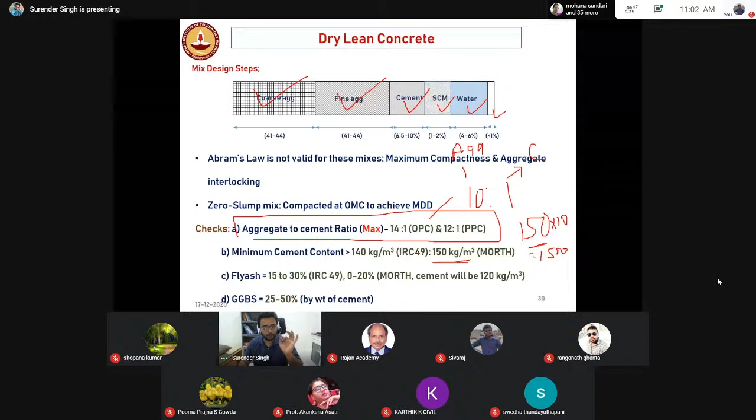The first step was you assume some aggregate to cement ratio, it should be less than 14:1. I'm taking 10:1. Assume the cement content - how much cement content am I taking? 150 kg, because the code says it should be minimum 150 kg. Then I get the aggregate fraction - what should be the coarse aggregate, what should be fine aggregate? I'll do the blending, as we learned yesterday, as per the stipulations.

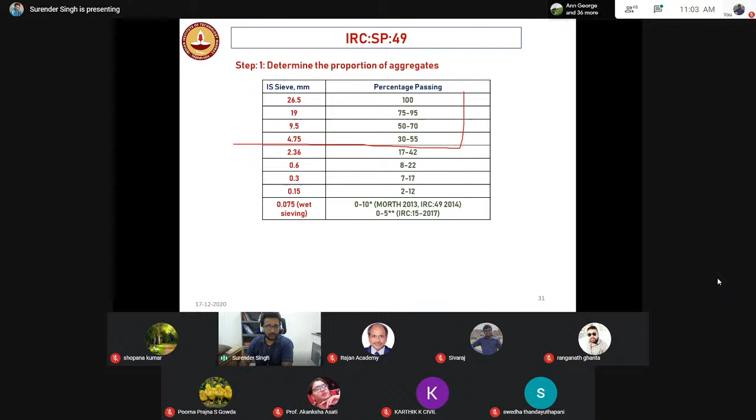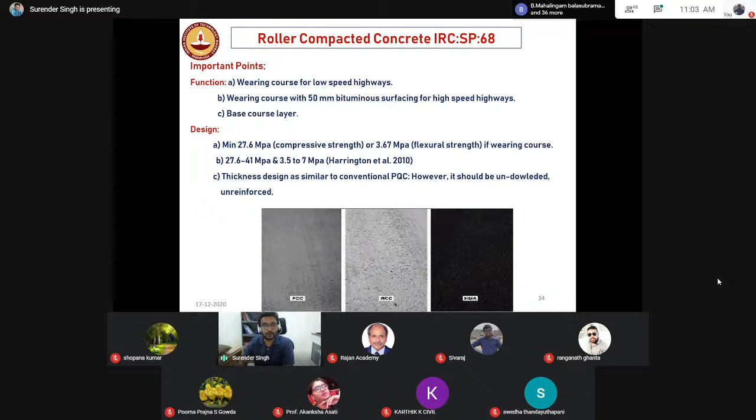Now we got the cement content, the coarse aggregate content, the fine aggregate content. The last thing is water - how to calculate it? You have to draw the OMC and MDD curve with the help of the Proctor method, and then you can do it. It's a simple thing. Similarly, for roller compacted concrete, there is a code named IRC SP68. For that also you have to follow the same approach - select the aggregate gradation, select the cement content, calculate the OMC and MDD, and here it's based upon the flexure strength.

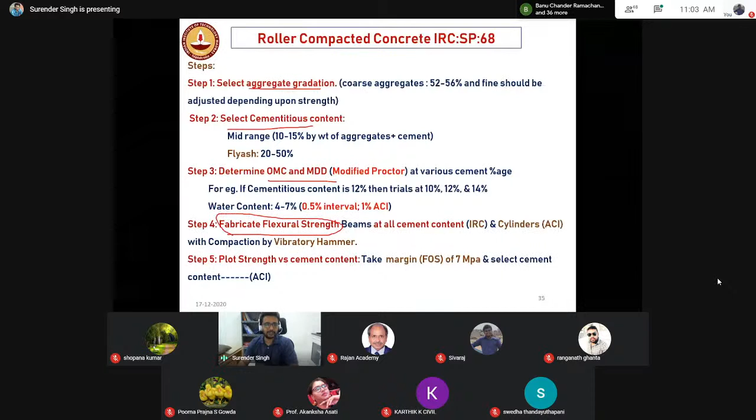If you are getting the flexure, it's okay. If you are not getting the flexure, you have to increase the cement content. Similarly, for interlocking concrete blocks also, the method is exactly the same. You have to assume the water by cement ratio and the aggregate to cement ratio, find out the OMC and MDD value, and then see whether you are getting the compressive strength or not. If you are not getting the compressive strength, you have to increase the cement content or decrease the water by cement ratio. So this was the last slide.

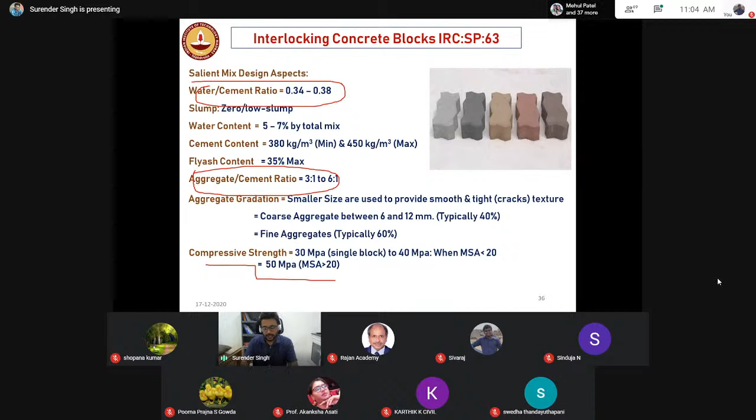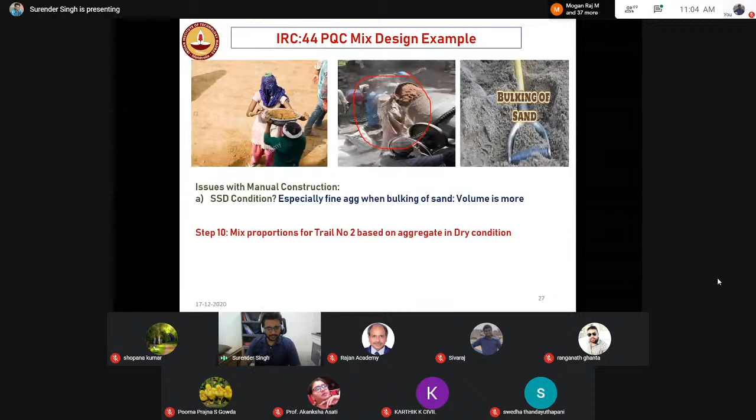I hope, see, usually I cover everything in 4 to 5 classes, but here I have completed it in 1 hour. So I'll be sharing my presentation slides with you. What you have to do is simply go and solve these examples. I have given the examples. If you have any doubts, you can anytime come to me, I'll be more than happy to resolve your queries. So with this, I would like to say thank you. And if you have any questions, you can type in the chat box.